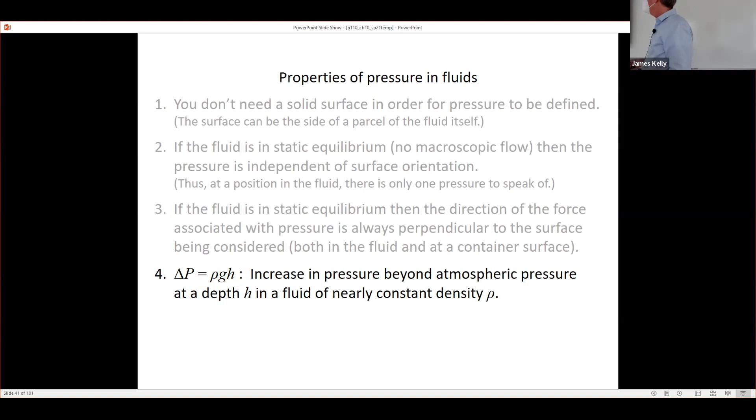Okay, let's try to justify that with a little calculation here. Here is a rectangular, sort of cube or rectangular box of water. It's got an area A on the top and bottom, and it's of height h, like this. One way to do it is to actually place the top of this at the surface of the fluid. I'm going to imagine this is water, but it could be any fluid, as long as the density is constant over this distance here.

What we're going to do is a free body diagram for this rectangular box of fluid and draw all the forces acting on it. One force acting on it is the weight, the gravitational force. Remember in the very beginning of this chapter you saw a quantity that looks like rho g V appearing over and over again. And remember, density is mass per unit volume, so density times volume gives a mass, and m times little g is a gravitational force. So when you see rho g V, this is a weight force.

Okay, it's sort of an unfamiliar collection of symbols, but it represents a weight. So the mass of this rectangular box times little g is rho times V, that's the mass. V is A times h, right? The cross-sectional area times the height gives me the volume of the box. So this is another way of writing mg, okay?

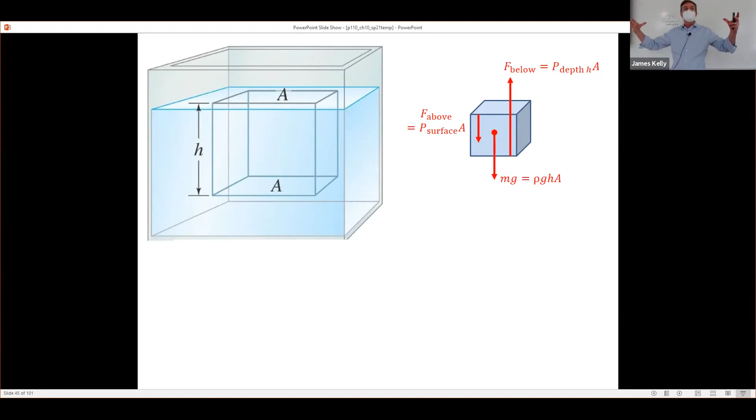But in any case, you don't have to believe that. The sum of these 3 forces better be equal to 0, because a box of water sitting in water doesn't want to sink or float. It's neutrally buoyant. It neither wants to sink nor float. So the sum of the forces is 0 on it.

So let me take plus y as up and do the sum of the force y components equals 0. We've got one positive y component, that's the force upward on the bottom, P at depth H times A, and 2 negative y force components. Just setting those equal to 0, we can calculate P at depth H minus P at the surface. Solving for that, P at depth H is equal to P at the surface plus rho GH. So that means the pressure at depth H is rho GH bigger than the pressure at the surface. Or when you go down by a depth H in a fluid, the pressure increases by rho GH. Okay, and that's our first result.

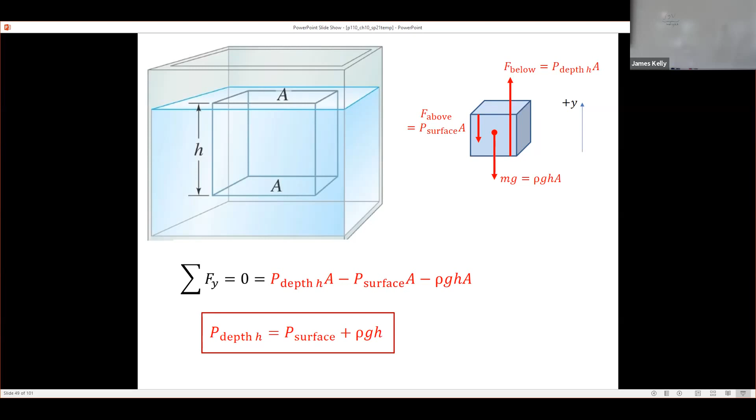Everything we've talked about so far is a little bit, I don't know, we can't calculate with it. Here's something we can calculate with. So let's do an example problem. That's what this was about. It's not only that you have to be at the surface and go down. You could actually be down at a certain depth in the fluid and go down by 1 meter, and you can calculate what the increase in pressure there is. You don't have to start from the surface to use that.

Well, if we want to know what the absolute pressure is at some point in the fluid, we need to know what the pressure is here at sea level, just due to the atmosphere, right? Because the pressure is increasing as I go down in the fluid, but it started out non-zero out here. In fact, we have quite a high pressure in the room. We're just used to it, so we don't notice the extreme pressure around us. And then it starts increasing as we go down in the fluid.

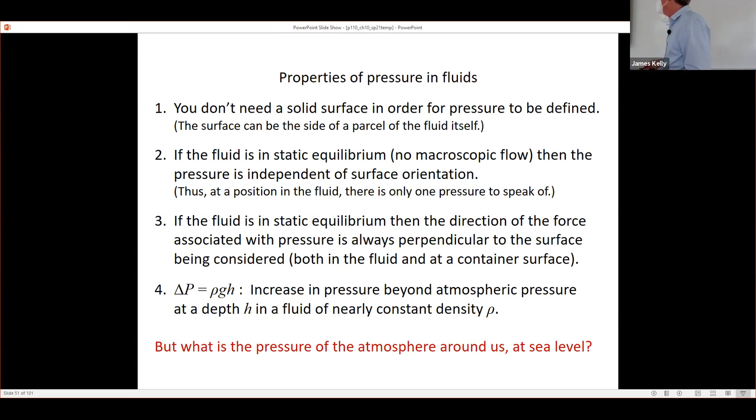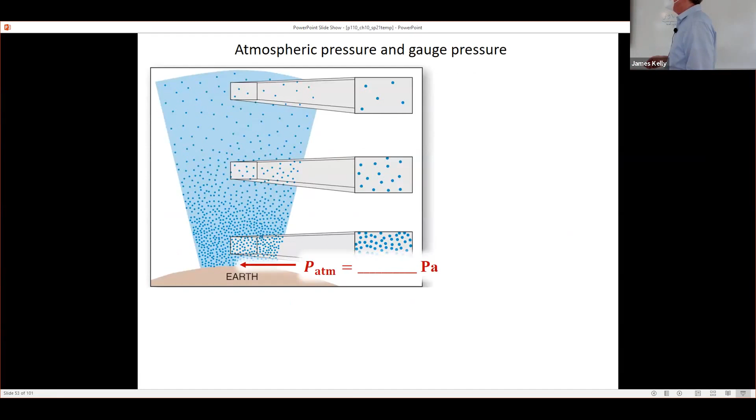So what's the pressure around us? As we discussed, the pressure in the atmosphere is increasing as we go down. We're interested in the atmospheric pressure at the surface of Earth, which does vary a little bit, but it's pretty much constant. And we want to know it in SI units, which remember is pascals. That's newtons per square meter.

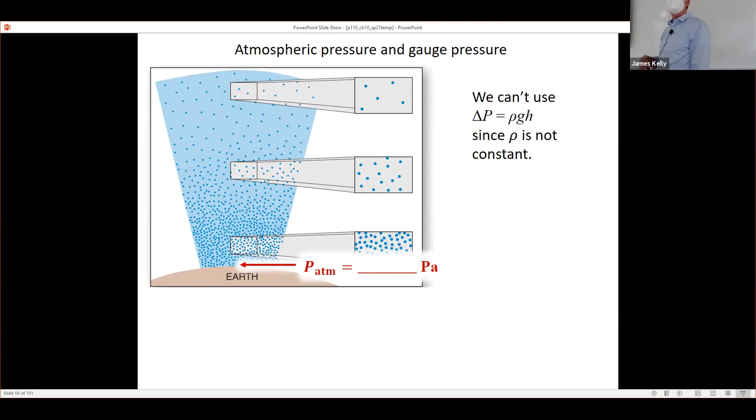We can't use delta P equals rho GH since rho isn't constant here. So we can't calculate what the atmospheric pressure is in any easy way that we've talked about in Physics 110 so far. That means someone has to just experimentally measure it and see what the pressure is at the surface. And so here's the result. It's very close to 1 times 10 to the 5th, or 100,000 newtons per square meter, or 100,000 pascals, or sometimes we write it as 101.3 kilopascals, but close to 100,000 in SI units, or 10 to the 5th.

That's the SI units. Because it's so convenient - those of you who have done some chemistry before - a convenient non-SI unit is atmospheres. An atmosphere is defined as the atmospheric pressure at sea level. So 1 atmosphere, which is not an SI unit, is the same thing as 101.3 kilopascals. It's just nice because you may not remember what the value is in pascals, but you are always assured that it's 1 atmosphere in these non-SI units. People will often state problems and say, well, the atmospheric pressure is just 1 atmosphere.

Now, to measure this, you can't just use a tire pressure gauge or something like that, because pressure gauges, the kind we're used to using to pump up bike tires or car tires, they don't measure absolute pressure. They measure what's called gauge pressure.

Gauge pressure is the pressure difference between the pressure at sea level and the pressure in what you're trying to measure. So when you pump up your bike tires to so many pounds per square inch, that's not the absolute pressure. That's how many pounds per square inch of pressure you have above just the ambient pressure around us, which is actually quite large already.

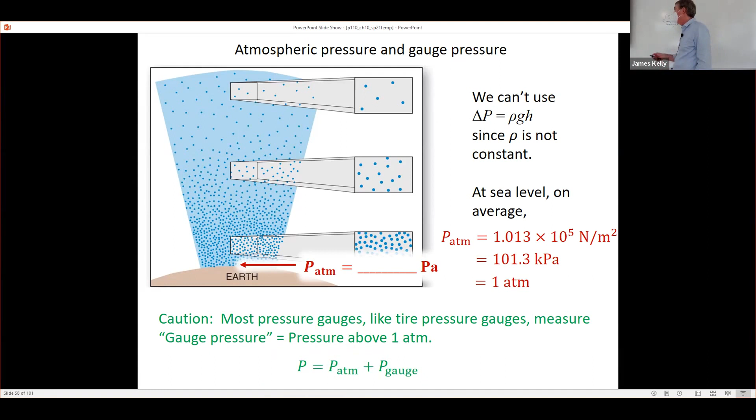If you want the absolute pressure, which is just plain old pressure, you have to add atmospheric pressure to the gauge pressure to get the absolute pressure. So if you know the gauge pressure in pascals, you just add this number in pascals onto it.

Maybe this is beating a dead horse here, but I had this picture from before where here's the absolute pressure. It's pretty constant here in the room, right? It is going down a tiny bit as I go from the floor to the top of the room, but I really have to go up pretty far, hundreds of feet, thousands of feet. You'll definitely notice it, your ears will be popping, but even hundreds of feet.

When I'm coming here from Lexington, you go down over the bridge to go over the Kentucky River, and your ears sometimes pop there, and you're probably only going down like 100 feet or something like that. It's not too far down. So we're sensitive to that kind of thing.

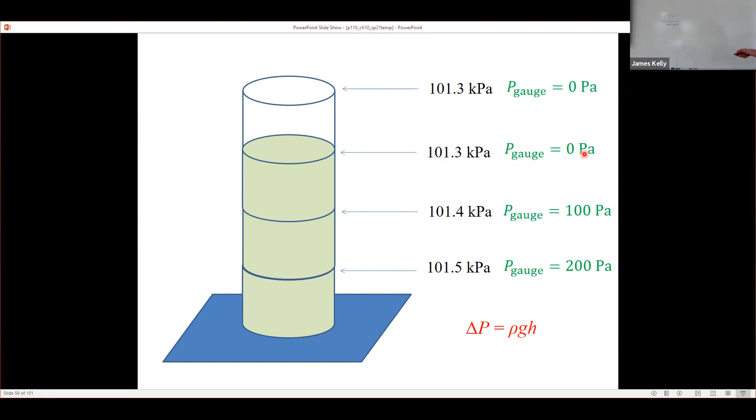But if you're talking about a graduated cylinder, there's not much pressure difference in the atmosphere between the top if it's empty and the surface of the fluid. But once I get in the fluid, the absolute pressure goes up. If this is what it is in kilopascals, remember 101.3 is atmospheric pressure. To get the gauge pressure, we just have to subtract off 101.3. So the gauge pressure is 0 there and starts going up from there.

Here's an example problem. Then we'll do one on a worksheet in just a second.

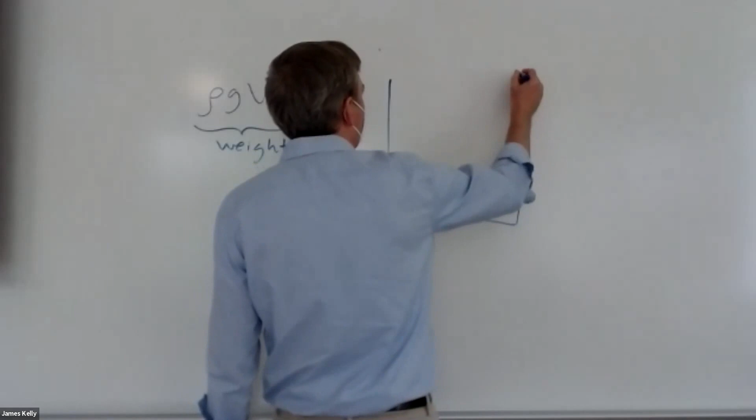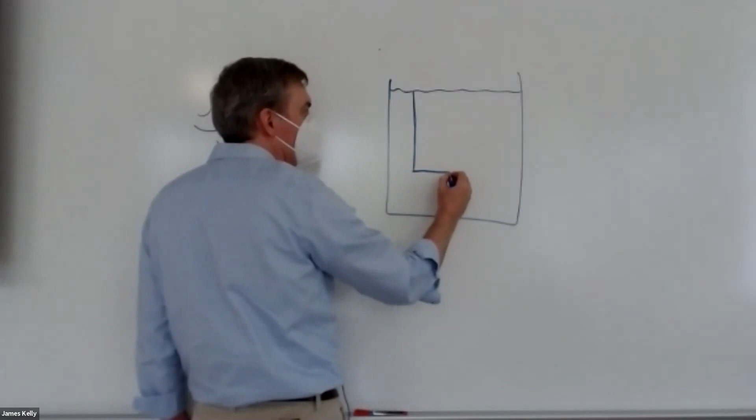But if you have some water like this, or some kind of fluid, the pressure increases, we found out, as we go down, according to rho G H, rho of the fluid times G times H. So if I go down a distance H, pressure increases. Pressure isn't changing as we go along there. Then the pressure decreases as we go along there, not changing, increases, not changing, decreases.

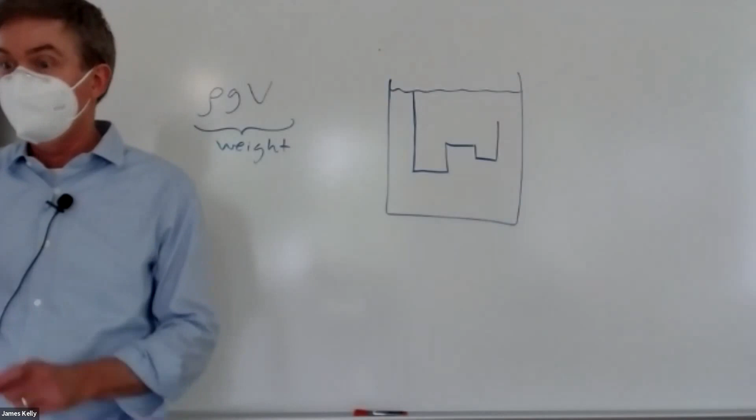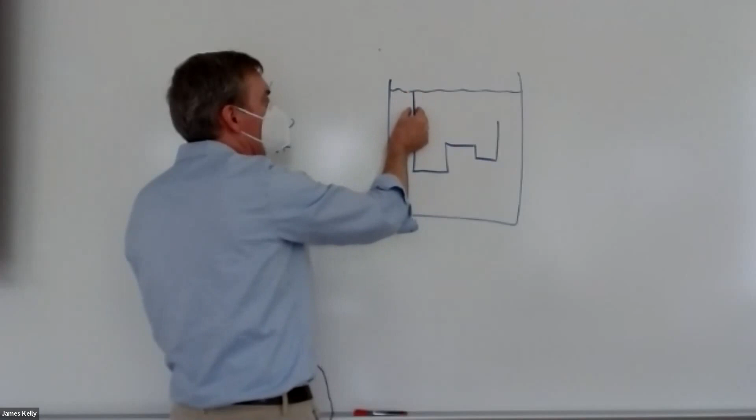So I can follow water through a pipe. As long as the water's not moving, we're talking about a static situation. We don't expect there to be any sort of frictional forces. And so even if this is just water in a very thin pipe, we can follow it down and subtract.

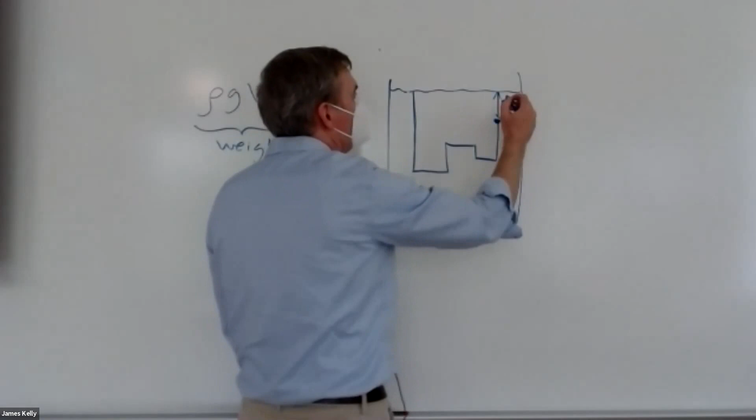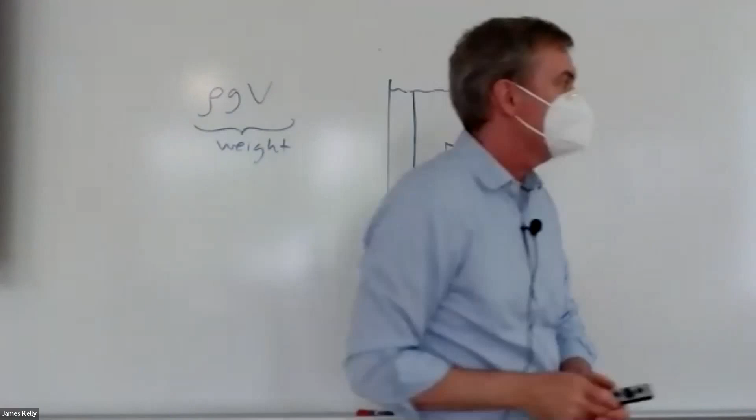And what I really care about, if I am interested in the pressure at this point, is how far that is, H below the surface. So that's what we're concerned with in this problem here: how far below the surface of the water is the faucet? And we're told that distance is 30 meters.

We get P faucet is atmospheric pressure plus rho of water, 1,000, times 9.8, times H, which is 30, and we get 395,000 pascals.

Notice, that's not particularly interesting, but it's quite a bit above atmospheric pressure—about 4 times what atmospheric pressure is. Notice that here, we've gone down by 30 meters and increased by about 3 times atmospheric pressure. Atmospheric pressure is 100 kilopascals. We've increased by almost 300 kilopascals, which means it's going up by 1 atmosphere almost every 10 meters.

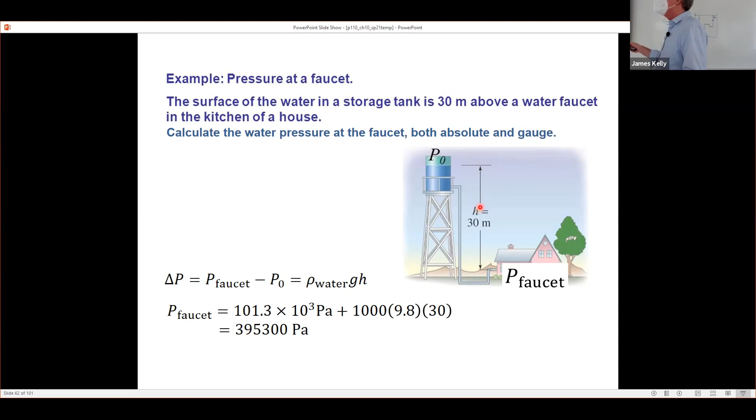So when you go down 10 meters in water, this is only true for water. It would be a smaller distance in mercury, and a much bigger distance in air. But for water, if you go down about 10 meters, it increases by 1 atmosphere. Go down another 10 meters, it increases by another atmosphere, and so on. It's not that big of a distance.

Notice that here, since we're calculating the absolute pressure at the faucet, this number is what we would call the gauge pressure—how much above atmospheric pressure that is.

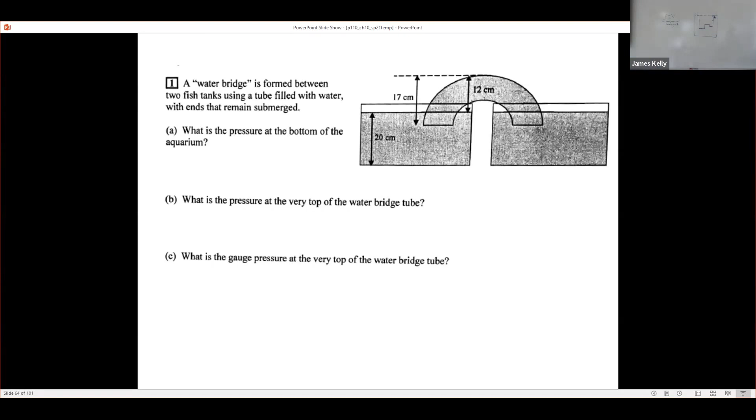Here we're just interested in the pressure at various locations: the pressure at the bottom of the aquarium, the pressure at the very top of the water bridge. The top of it is 12 centimeters above the surface of the aquarium. And finally, what the gauge pressure is at the very top of the water bridge tube. See if you can answer those.

Maybe I should arrow back. You might want some of the numbers appearing here. Atmospheric pressure is shown on there, and the density of water is 1,000 in SI units. You'll need that too.

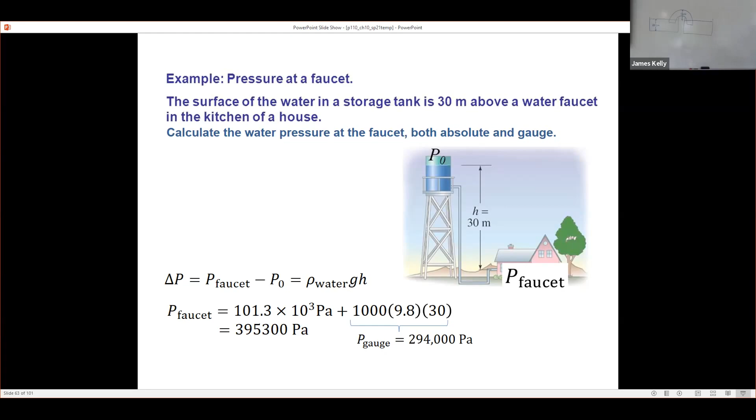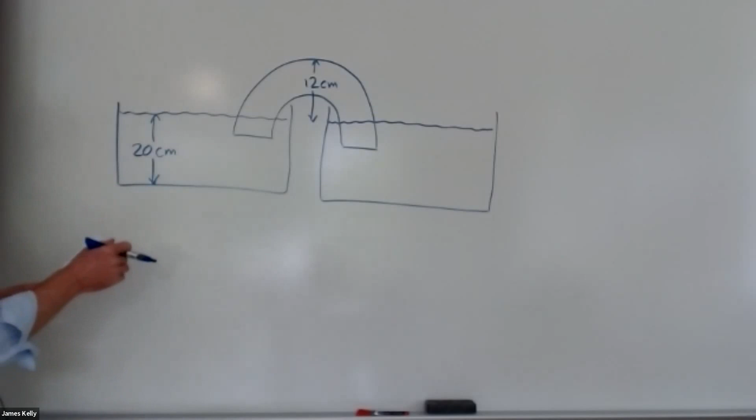Okay, here's my rough sketch of the aquarium situation. The bottoms were supposed to be equal, but they don't look quite equal there. In part A, we're asked, what is the pressure at the bottom of the aquarium? That's 0.2 meters below the surface. The surface, we're going to assume, is at atmospheric pressure. That can vary a little bit, but this is sort of the average value of atmospheric pressure.

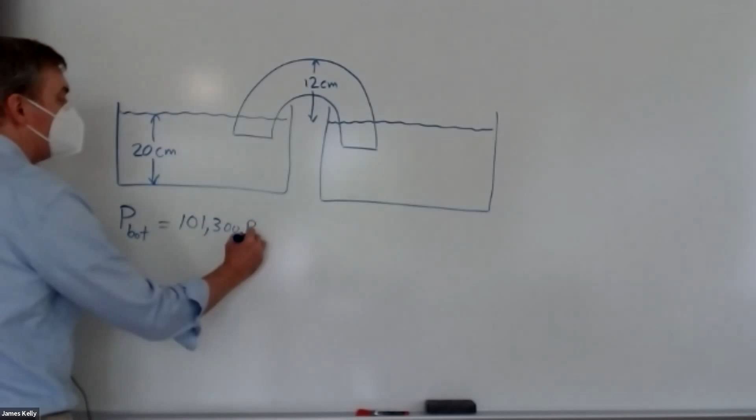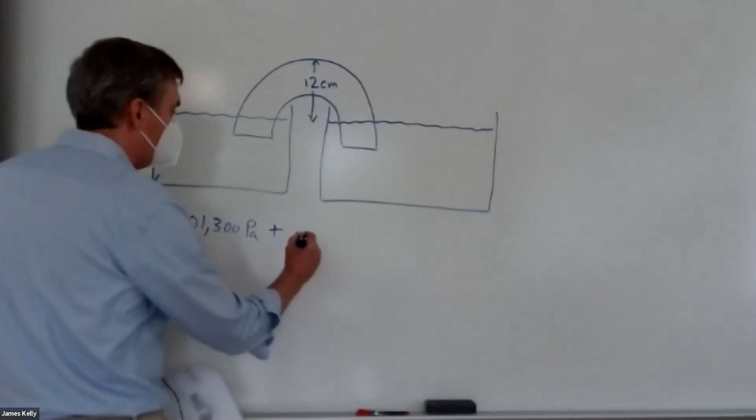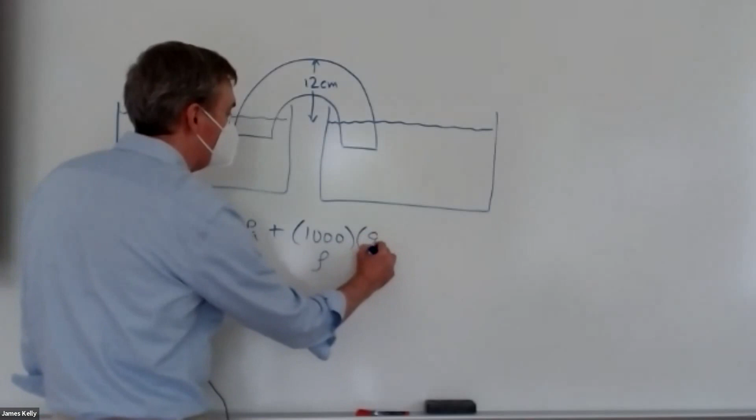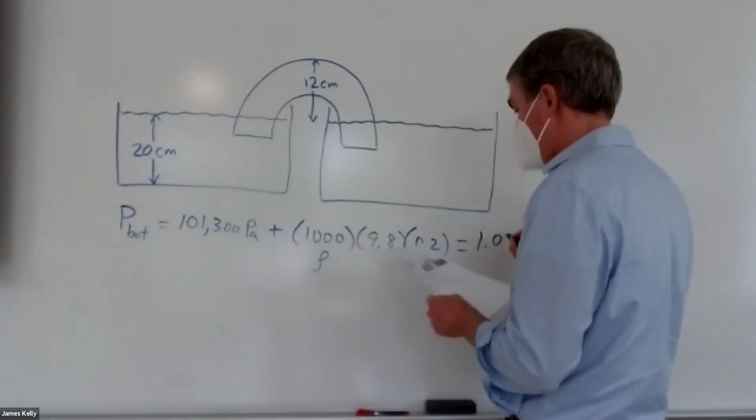So the pressure at the bottom is equal to the pressure at the surface, which is 101.3 kilopascals. Pressure at the bottom is the pressure at the surface plus rho*G*H, where rho is the fluid we're talking about—here water, with rho of 1,000, times G is 9.8, times H is how far you're going in depth in SI units, that's 0.2 meters. Calculating that all together in pascals, I get 1.033 times 10 to the 5th pascals. It hasn't gone up much from atmospheric pressure, not surprisingly.

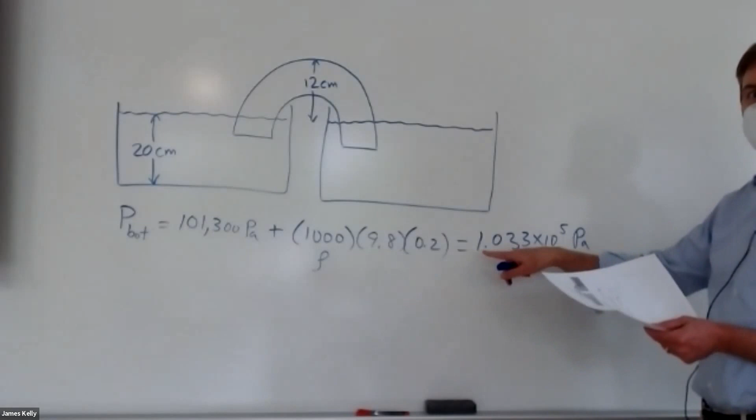Remember, to go up by 1 atmosphere, you have to go down 10 meters. So this very small 0.2 meters is not close to that—it's going up by a small fraction. So that's P at the bottom, that's part A. What's the pressure at the top of the water bridge?

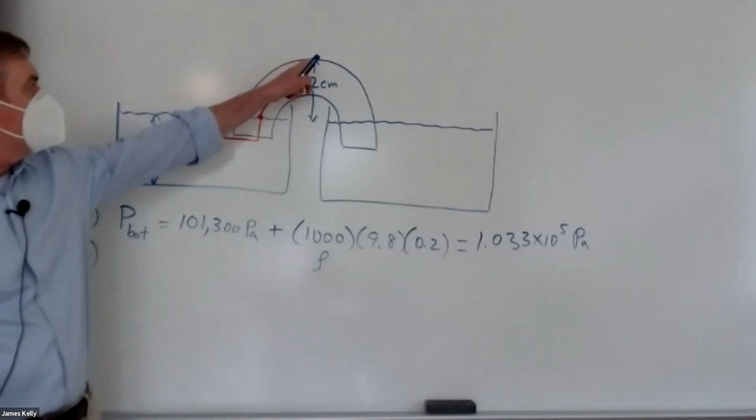Well, here we're above—following a path from the surface of the water, the pressure is atmospheric pressure there. It's increasing, then it stays constant, then it's decreasing. Now we're back at atmospheric pressure there, and it's still decreasing further as we go up to the surface there. The question is, what is it here compared to there? Well, it's going to be less, right? It's got to increase as I go down in the fluid, and therefore it's got to decrease by rho*G*H as I go up in the fluid.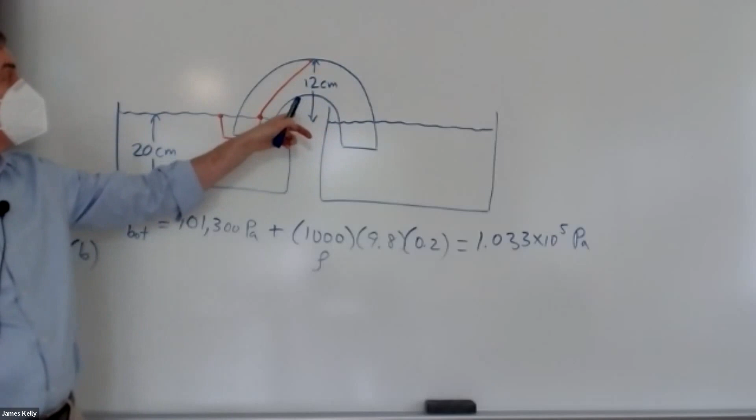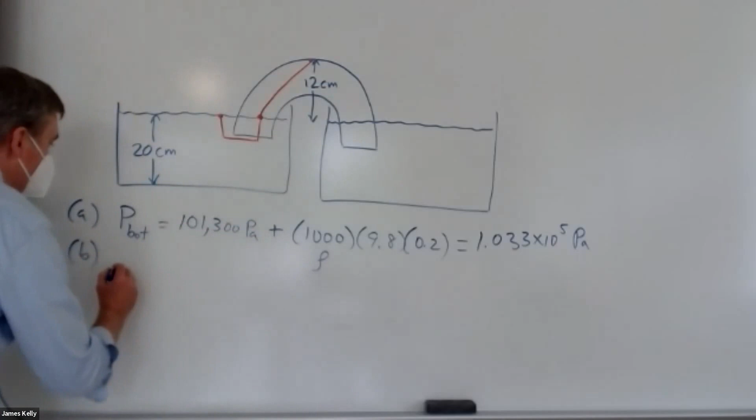And the H we're concerned with here, compared to atmospheric pressure, is 12 centimeters above a point where it's at atmospheric pressure. So I might write that as: pressure at the top of the bridge is equal to atmospheric pressure minus—since it's going down as you go up in the fluid—1,000 times 9.8 times 0.12.

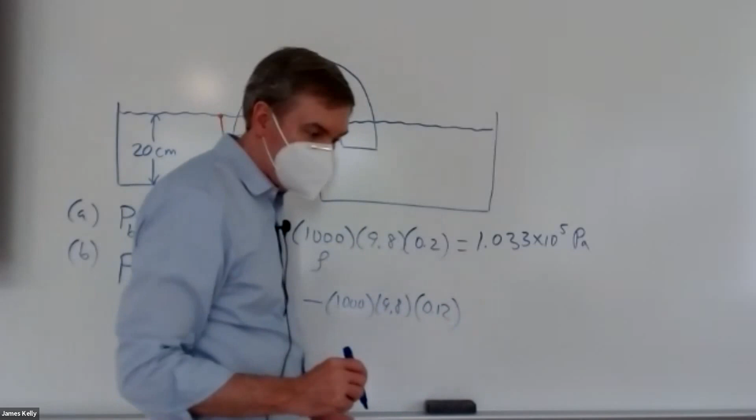Okay, on my solution, I have 1.00 — again, it's not that big of a difference from atmospheric pressure. 1.001 times 10 to the 5th Pascal, or 100.1 kilopascals. Questions so far?

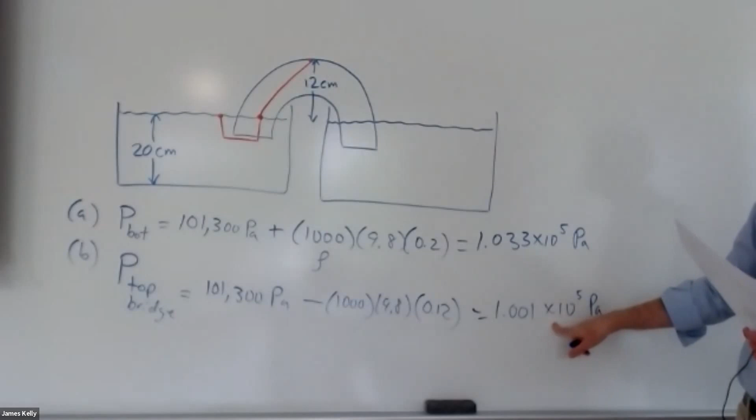Okay, the gauge pressure is by definition the pressure at the point you're measuring minus atmospheric pressure. And atmospheric pressure is greater than this pressure, so when we subtract them, we're actually going to get a negative gauge pressure. Most tire pressure gauges don't tend to ever have to measure something at a negative gauge pressure just because we don't use them that way.

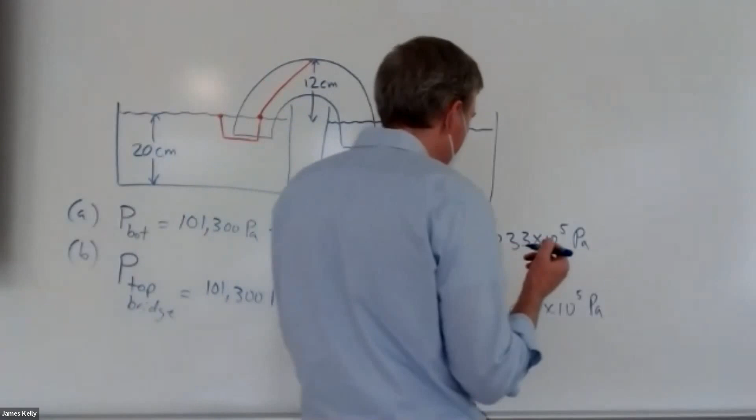That's why they don't have a negative part of the scale. But there's no reason a pressure gauge couldn't go positive and negative if you applied a suction, so to speak, to one side. So the gauge pressure is just this number minus this number, which I get as minus 1176 pascals. Sorry, that's at the bottom there, but hopefully you guys can see it. Any questions on that?

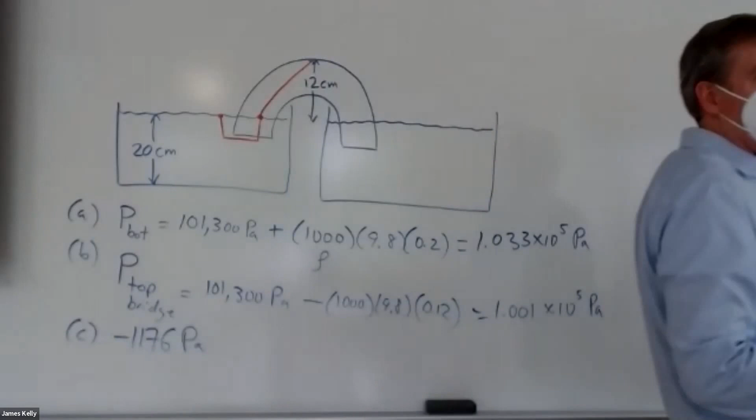It's just playing around with the formula. Dylan asks: why did you subtract the two pressures from part B, but in part A you added them together?

I did that because this H, when we use the formula rho GH, the H means how far you're going down in the fluid. If you're going up in the fluid, H is negative. So I could have put this as a plus with a minus 0.12, or I just said it has to increase by that amount as I go down here, so it's got to decrease by that amount as I'm going up in the fluid. So I just subtracted off the same number. Either way. Other questions?

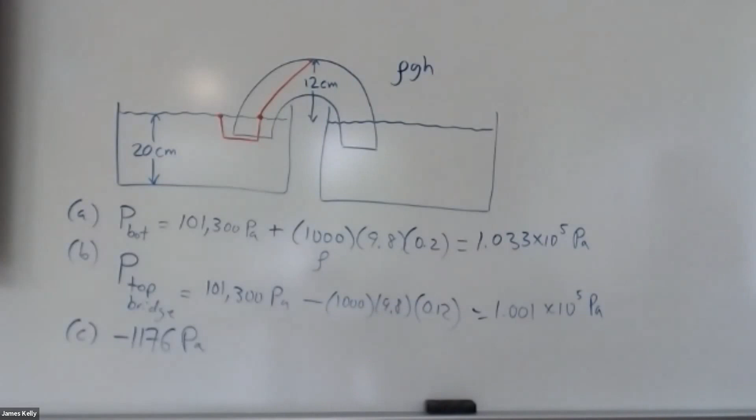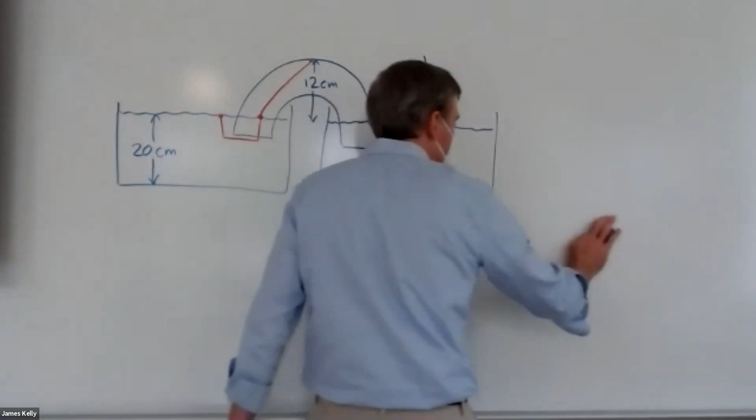There was an experiment that I just don't have quite set up that we could have looked at in the lab, related to this. I've got a long flexible but clear plastic tube. This was an experiment that when I was in graduate school, we used to do with the undergraduate physics classes.

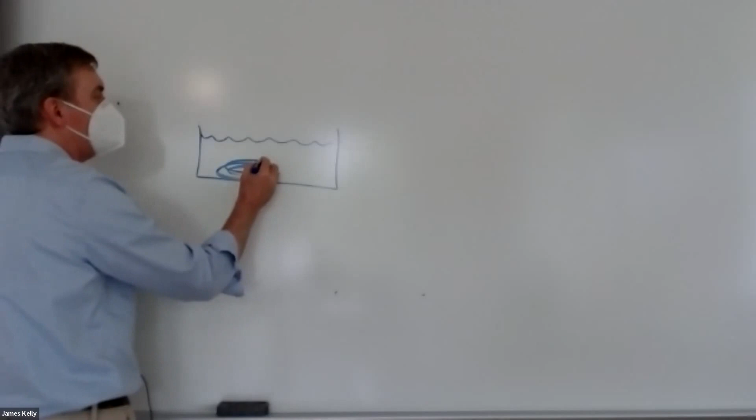You know, sort of in the basement of a stairwell, get a big wide bin and fill it with water. And you take one of those flexible plastic clear hoses, maybe about a half inch inner diameter, and fill the whole thing up with water, and it's all coiled down in here, but the whole thing is filled with water, right? And it's coming up, filled with water. You let all the last bit of air out of the top.

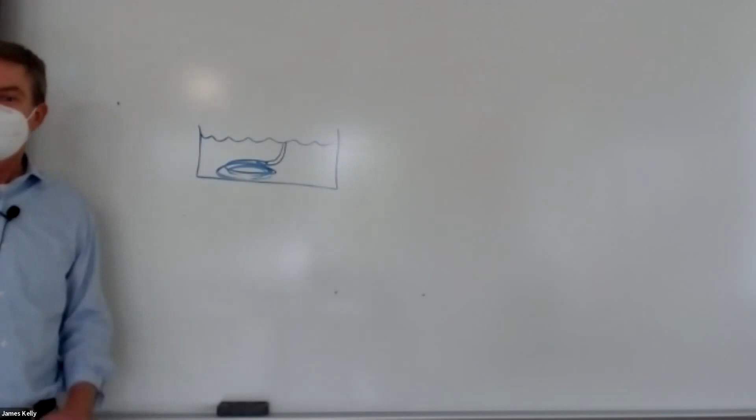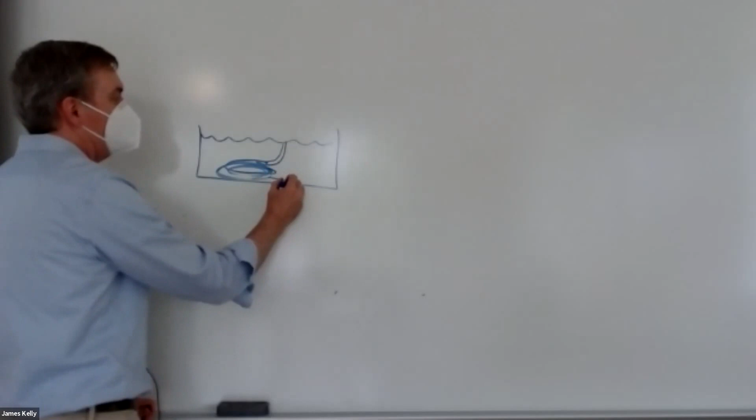And then you can cap it with your thumb if you're strong enough, or you can put some sort of very strong cork in there to keep air from getting in. So you're capping it in there. And the other end is just sitting open at the bottom, open to the fluid. And what you're going to do is keep this capped end capped with your thumb maybe,

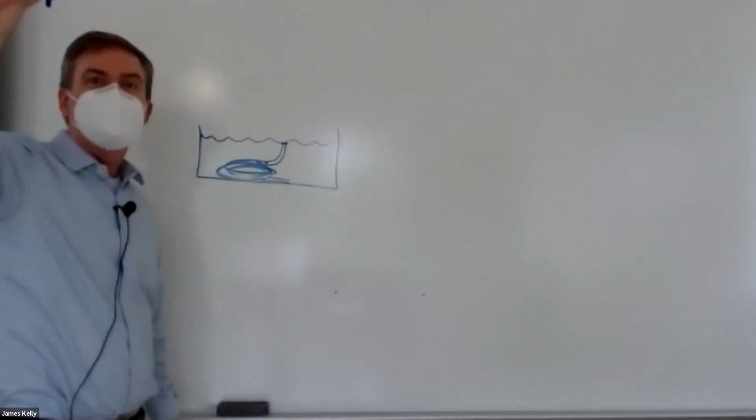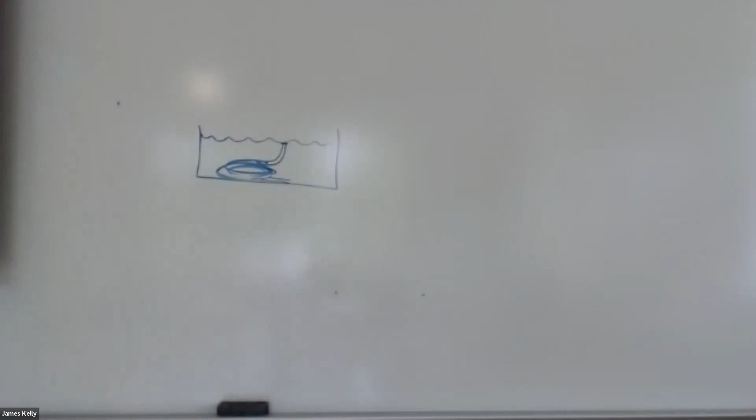and you bring it out of the water and you start going up. You're in a stairwell and you start walking up the stairs. Okay, first floor, second floor, third floor. And at some point up there, something very strange happens. Okay, you're watching it, you've got the fluid in here. You're walking up, up, up, up. And suddenly, as you're watching the fluid where your thumb is, something remarkable happens.

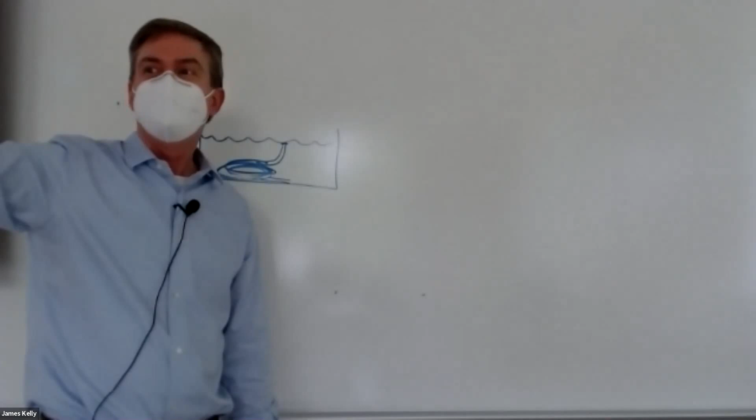Suddenly, at a certain point — anybody have an idea what happens? No, it doesn't shoot out. I mean, I'm assuming you're strong enough to keep it, and the hose is strong enough to hold it in, and the hose is strong enough that it doesn't collapse or explode.

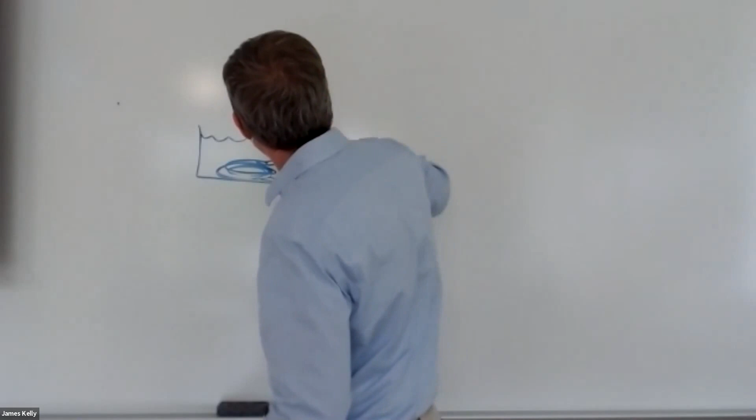I'm going to carry it up. So let's suppose I carried it up, so I've got the surface of the hose coming out, it's all filled with fluid, and I've carried it up. It's capped at the top, right? However I do that. So suppose I totally seal it off, no air can get in there, it's capped to the top. Here it's at atmospheric pressure. Here it's at greater than atmospheric pressure.

But when I go through the tube, it's back at atmospheric pressure by the time I get to the surface of the water. Right, it's gone up, then it's roughly constant, and then it goes back down to atmospheric pressure. Now it's less than atmospheric pressure, even less, even less, even less, even less.

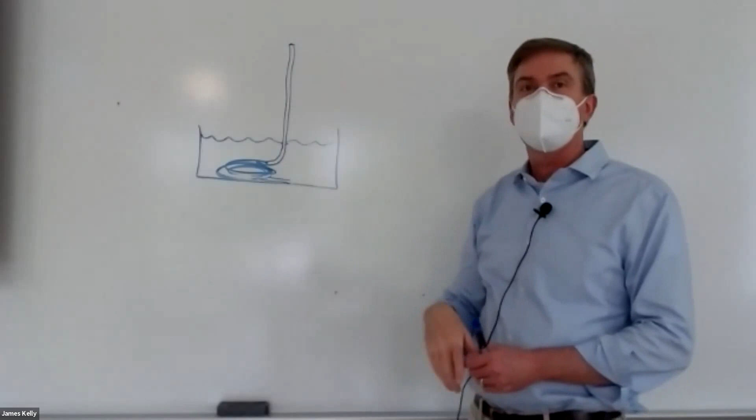The whole tube will be filled with water, like whenever you put your straw in a drink and put your tongue over it. So it will totally be filled with water, and that's probably not surprising to you, right? You're carrying it up, it's filled with water. You're pulling this water-filled tube up.

You've got it totally sealed off. Maybe we absolutely weld the thing together, melt the plastic so no air can get in there. You get up about 3 stories up, depends on how high the stories are, and all of a sudden, air appears at the top of the tube. And you start walking up, and the level of the water just stays constant. You can walk up several stories from there, and the level of the water will just stay constant.

Where did the air come from? And then as you come back down, the level stays constant, and all of a sudden it's filled with water. It stays filled as you go down.

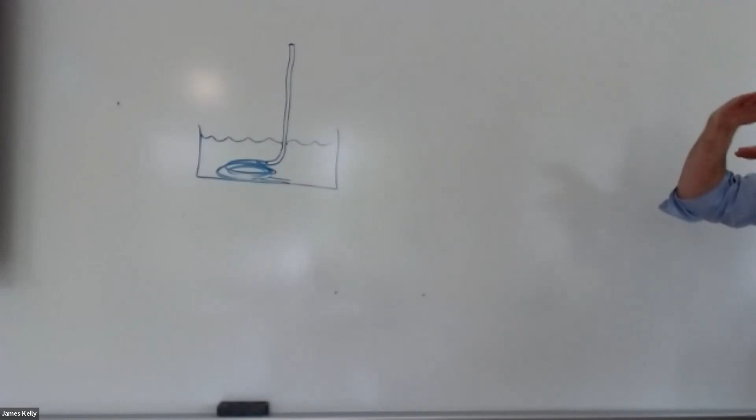Sorry, I'm sort of gesturing maybe to the side of the camera. I don't know if the same camera could see that, but...

It's quite remarkable, and it works really well. Except that, well, let me just explain what's going on, right? The pressure is going down. It's going down, down, down as you raise this up. Keeps getting smaller at the top because I'm raising it smaller and smaller.

What's causing that fluid to stay up there? Well, you can think of it as there's pressure down from the atmosphere, which is pushing it and causing it to go up to a certain height in the tube. And as long as the pressure is greater than 0, it keeps pushing the fluid up. But you can't have pressure that's less than absolute 0.

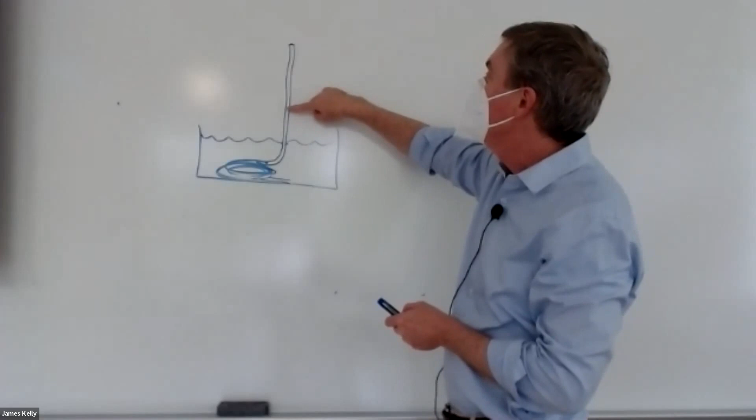So what happens is at some point, the pressure in the tube, you've gone up several stories, and you keep raising it up, and the fluid level just stays right there. Keep raising the tube up, and the fluid level just stays right there. This is the point at which the pressure has gone to 0 up there.

What's causing this fluid from not falling down? Well, there's pressure that's holding it up from the bottom, able to support the weight of the fluid above it. But at some point, if the pressure is 0 here and you try to put some fluid on top of it, there's nothing to push, right? The whole force from the fluid below would be the pressure times the cross-sectional area. If there's 0 pressure right here, this fluid's just going to fall down to that level until there's fluid below. So it's quite amazing.

You raise it up, the fluid stays at the constant level. You raise it back, you pull it back down, and the fluid is essentially at the same level.

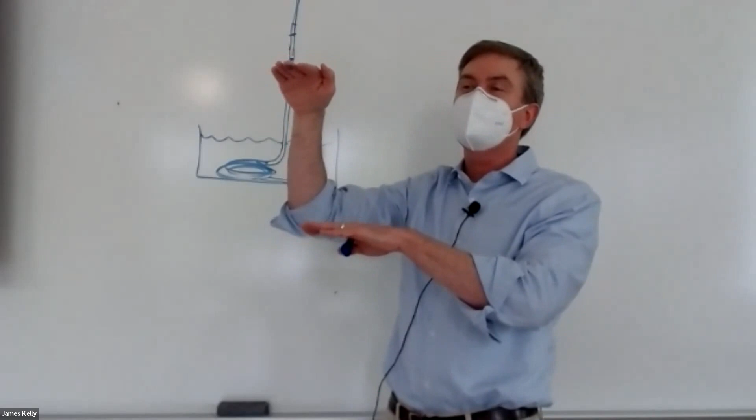The disappointing thing is there's always dissolved gases in water. And so unless you've bothered to get all of the dissolved gases out of it, some of the gases, when you get pretty close to a vacuum up here, will come out of solution. And when you pull it back down, you might have like a centimeter of gas at the top of the tube. Then you go back to the bottom, you let that out. If you do that a few times, you'll get all the dissolved gases out of the tube.

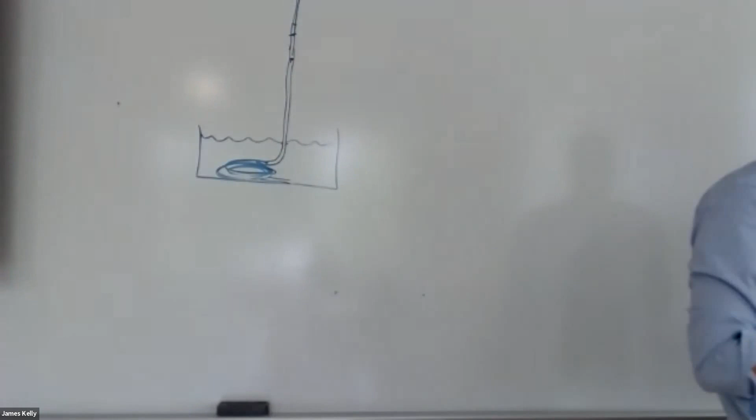It's quite amazing. I was going to set it up, but I just don't have the right setup. I tried to do it with a stopper at the top and vacuum grease, but I was still getting air leaking in, because once you pull it up to the point where that fluid stays at the same level, that's pretty much a pure vacuum at the top. Now there's a little water vapor in there too, so it's not exactly a vacuum, right? When you get very low pressure, the water wants to boil or evaporate out into what would have been a pure vacuum at the top, but it works remarkably well.

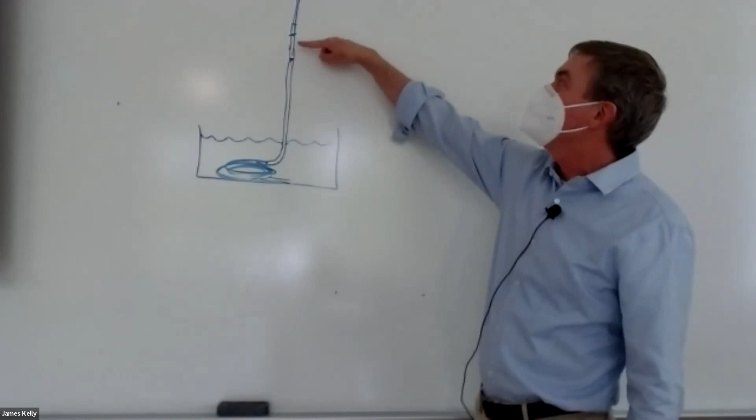So it's just another kind of thing like that water barometer, a very tall one. There's a classic physics problem in introductory textbooks: suppose your neighbor wants to steal water from your swimming pool by siphoning it. How tall do you have to make your wall so they can't siphon your pool water out? You have to make it taller than the point at which the pressure would go to zero, because once it hits zero, it doesn't matter how much you're sucking on the other side—there's nothing below zero pressure.

That means there's no more pushing from the bottom. If you try to put fluid on top, it immediately sinks down because there's nothing to hold that extra weight up above it. All right, that's rho-g-h, one of our calculational formulae, not too hard to work with.

Here's a second thing we can calculate with: Pascal's principle. If I've got this flask filled mostly with water, the pressure at the top of the flask is below atmospheric pressure, right? It's just like being at the top of the tube. Now that we've done this problem, it's not that amazing sounding, but...

Pascal's principle says if you have a confined fluid—some liquid in a bag, or a system where there's a piston that can push on it—if you apply some external pressure to that confined fluid, the pressure increases at every point in the fluid by the same amount.

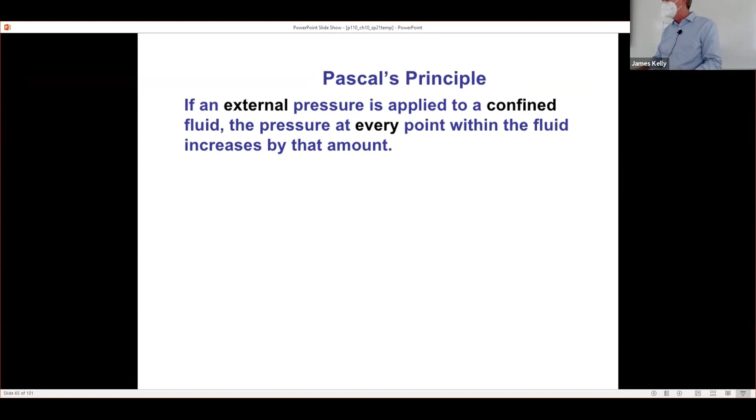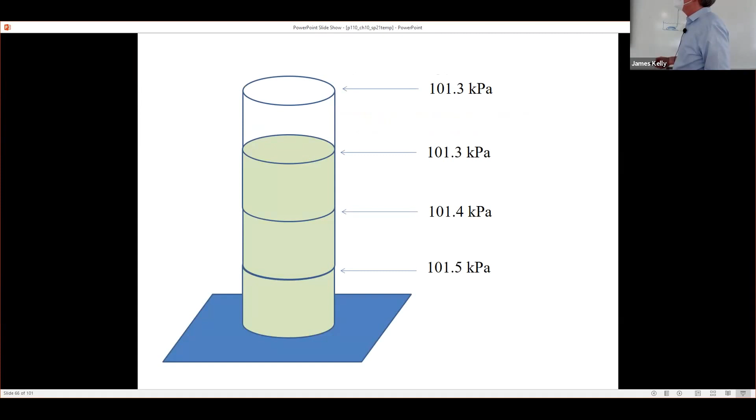That is to say, if I had a cylinder of fluid right here and put a piston on top of it and pushed down, the pressure would go up by the same amount everywhere. Here's my same recycled picture of a cylinder with fluid in it, maybe water. The pressure is pretty constant up in the atmosphere, but starts increasing as we go down in the fluid.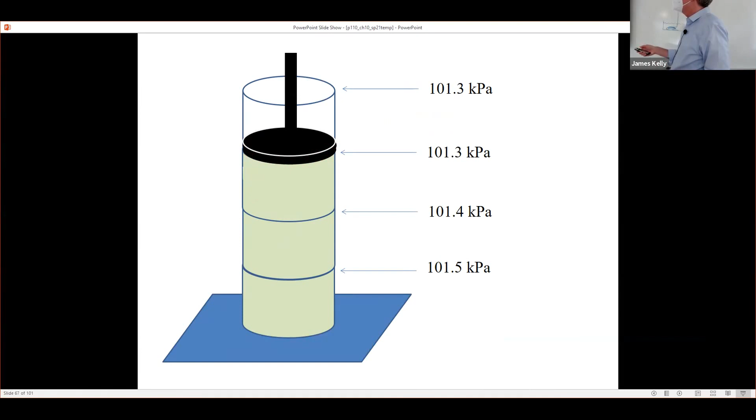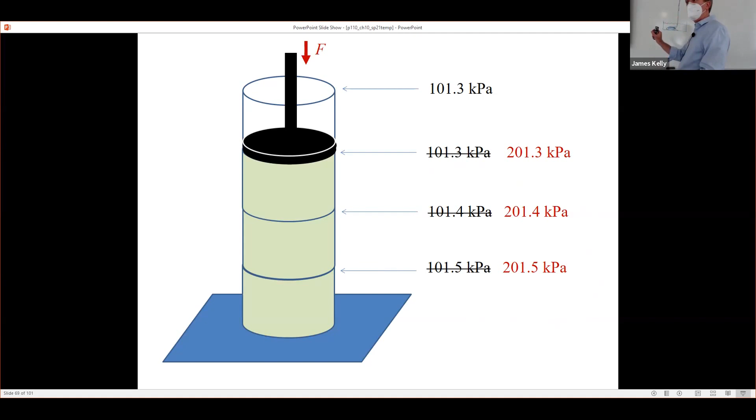I'm imagining some sort of piston so I can push down on the top of the fluid, sealed around the edges with a little rubber gasket, kind of like a syringe. I apply a force down, and the pressures inside the fluid are no longer the same as before—but however much the pressure increased at this depth, it increases by the exact same amount at every other depth. So if it goes up by 300 pascals at one point, it goes up by 300 pascals at every point in the fluid.

We can make some nice machines out of that involving hydraulics. One nice thing about hydraulic fluid is you can push in one location and change the direction the force is applied by having it wander through tubes. If I push on this piston, it tends to push this piston to the right, and this piston wants to go to the left, because increasing the pressure here increases the pressure there, and that pressure times this area gives a bigger force.

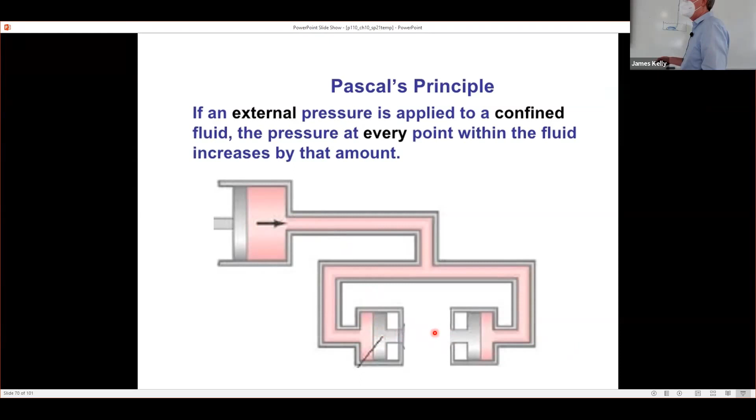That was just a piece of this picture of disc brakes. Here's the disc in your car. You push on the pedal, that pushes the master cylinder into the fluid, increasing the pressure in the fluid here. By Pascal's principle, that increases the pressure in the fluid here and here, exerting a bigger force on this piston and pushing your brake pads—hopefully not made of asbestos anymore, something that can handle ceramics probably. It's useful for transferring forces in different directions without weird cables and sheaths. Here's a hydraulic lift.

The idea is by applying fairly small forces, you can lift things that have great weights. For example, if I've got a car on a lift—now don't take this picture too literally, there's not this much hydraulic fluid in a hydraulic lift—but imagine I've got a very small cross-sectional area over here and some sort of piston that I can push down with, and I've got a very large cross-sectional cylinder over here.

They're calling that A out in the figure, and we've got the pressure here just underneath that. Now in the way it's drawn here, the height in the fluid—whatever the pressure is here at the side, it increases as I go down in the fluid, then it stays constant, then it decreases. So the pressure right here is the same as the pressure right there.

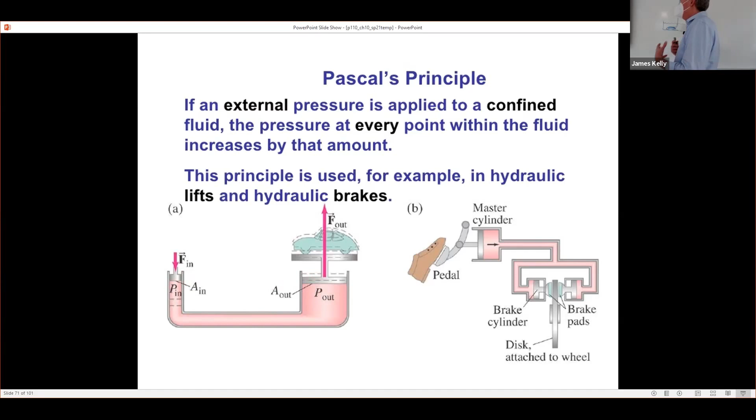The pressure is the same. That doesn't mean the force is the same, because the force associated with the pressure is pressure times area. So let's do a little bit of a calculation associated with that. It's amazing that just by pushing with a very modest force on this side, you can get a huge force upward on this side. I might be able to push with 1 Newton on this side and lift up a 10,000 Newton weight on the other side.

So here again, the starting point is to use the fact that the pressure here is equal to the pressure in the fluid over here. The pressure is changing, increasing as you go down, but at the same height the pressure is the same. The pressure is the force divided by the area. See what that means for the force on this side compared to the force on this side.

So the question is, if we want to lift a car that has a weight of 10,000 Newtons, how hard do we have to push down on the piston on that side if the radii are 1 centimeter and 1 meter? Problem 1 in the worksheet.

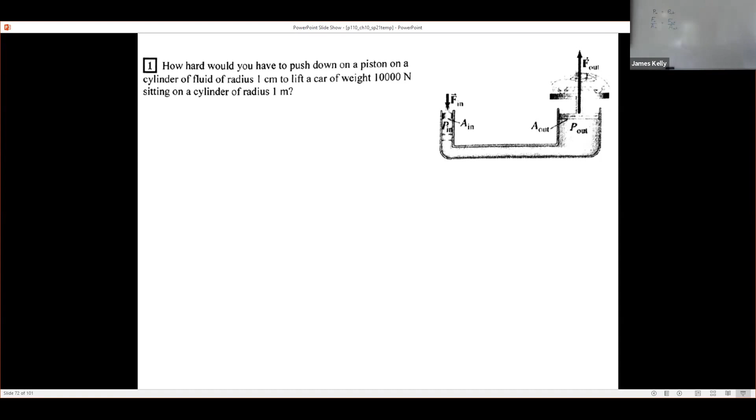The idea is here—before I started pushing down, it's very close to atmospheric pressure here, and very close to atmospheric pressure here, because nobody's pushing on it. We don't have a car on this side, and I'm not pushing on this side. Pascal's principle comes in when we put these forces on the two sides: the pressure increases to some huge amount here, and it also increases to some huge amount over here.

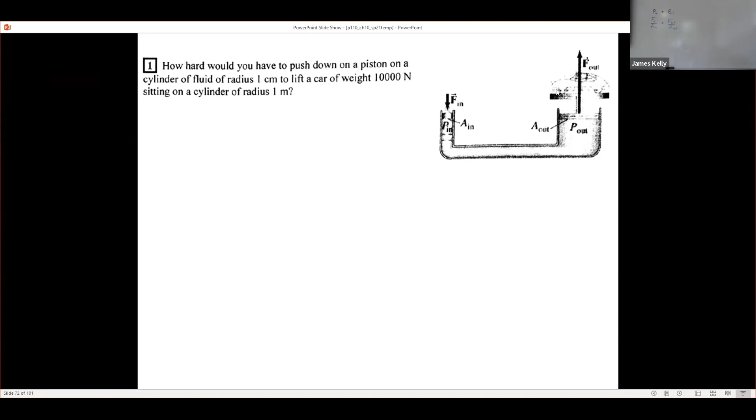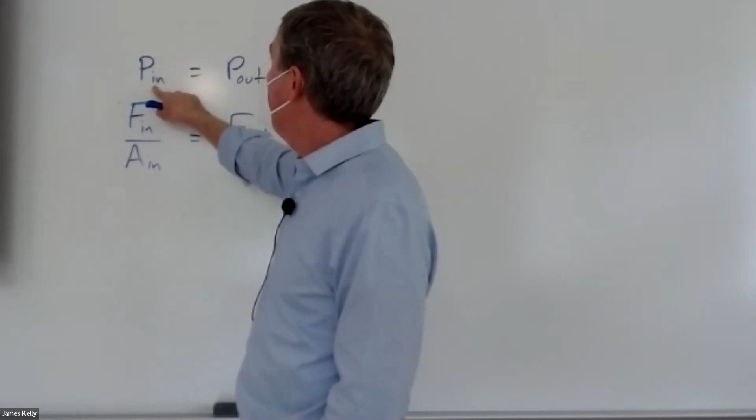That's the only point where we're using Pascal's principle. The rest is just the definition of, or relationship between, pressure and force. The pressure at the piston on the inside, the side we're pushing on, is equal to the pressure being pushed up on the cylinder on the outside. That means the force on the inside divided by the area on the inside equals the force on the outside divided by the area on the outside.

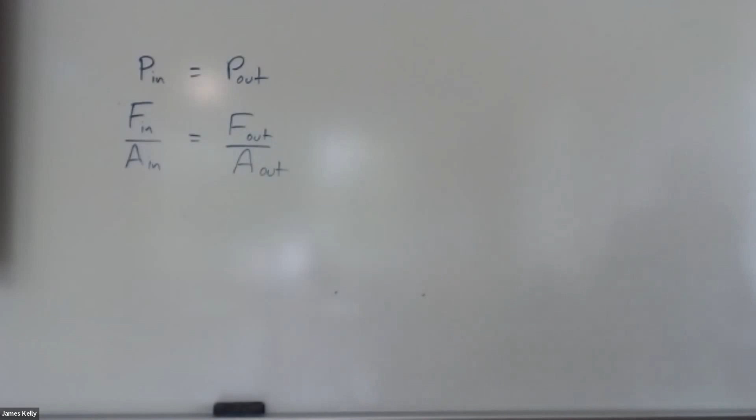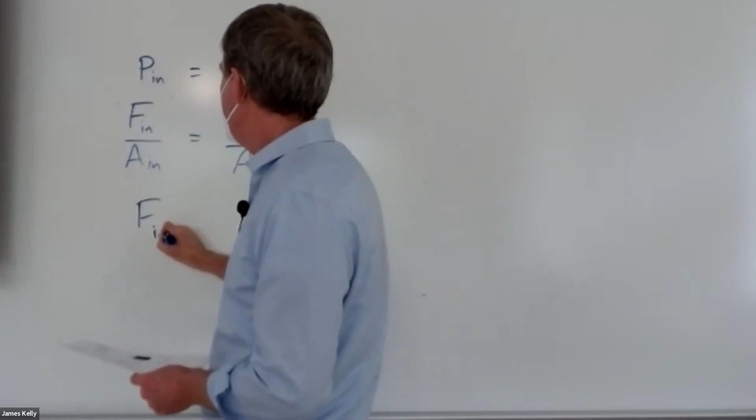And I can solve for the required force on the inside and put in the numbers. The area, since we were given the radii, we can just do pi r squared. So the force on the inside is equal to the force on the outside, which we're told we want to be 10,000 newtons, times A in over A out.

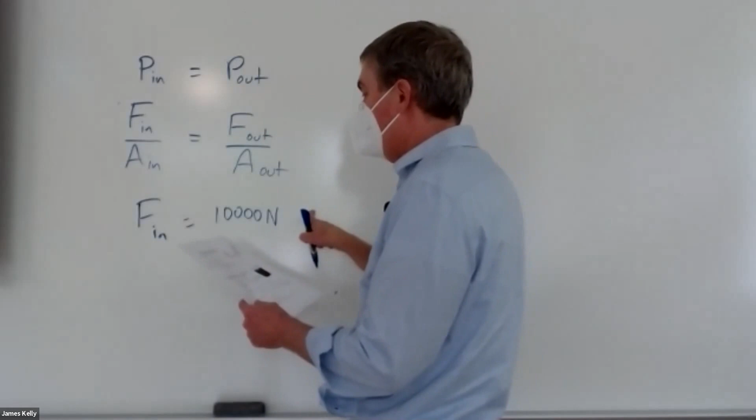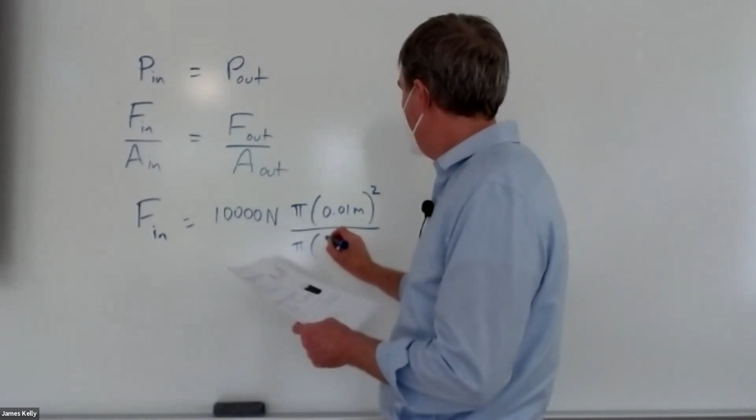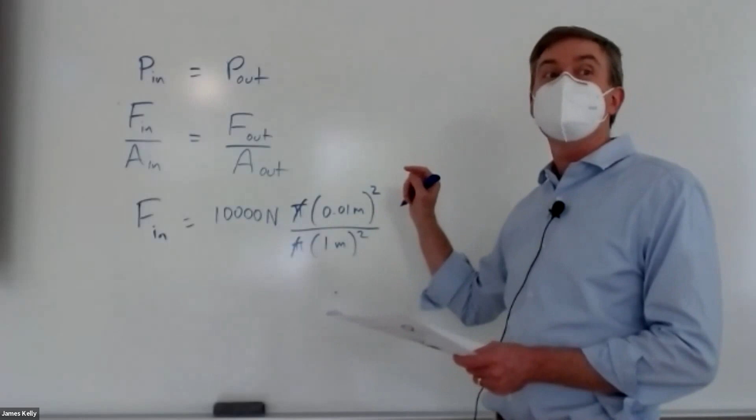So A in is pi times that radius, 1 centimeter, squared. I'm putting it all in SI units, although you don't really have to here, that would cancel out. And here the radius on the car side was 1 meter, squared, and the pi's cancel out. Notice that even though this is a huge number, we're going to multiply by something small: the denominator is 1 after squaring, but the numerator is 1/100th, and when I square it, I get 1/10,000th, which then cancels out the 10,000 and actually gives 1 Newton.

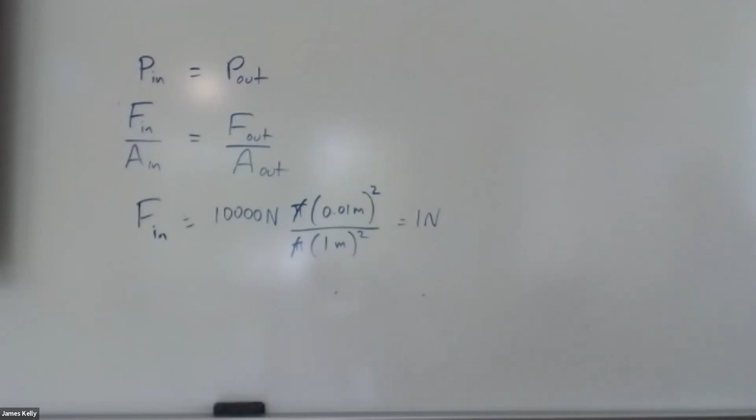So this is the idea of something called mechanical advantage in hydraulic systems, where it's sort of like using a long stick as a lever—by applying a very small force here, I can lift up something very heavy. It's the same here: applying a small force at one side, I can lift up something very heavy on the other side. Okay, let's stop it there.